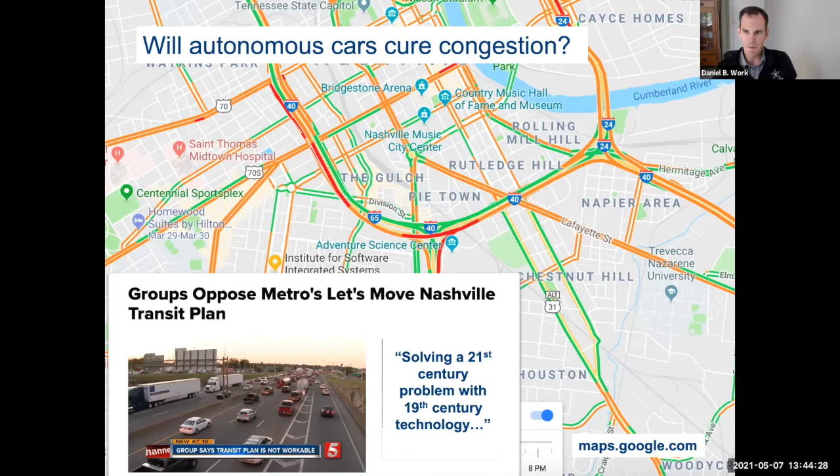Now I'm ad-libbing a bit here to make the point more extreme, but everybody involved in transportation knows that congestion, the typical Google Maps traffic you see, is the imbalance of demand for travel and what the infrastructure can supply. It can be out of balance with regular drivers, and it can be out of balance with autonomous vehicles. What's important if you want to predict what autonomous vehicles will do for congestion is you need to be able to predict both of those consequences: what's it going to do for the demand, and what's it going to do for the supply?

One of my favorite studies in this area addresses the question of what will happen to demand. The challenge is that we don't have fleets of robo-taxis available today to experiment on. So what can you do? Well, you can do the next best thing: give drivers a chauffeur for a week, with a set number of hours they're allowed to use that chauffeur, and see what happens.

I love this study because its directionality must be correct, right? If you gave me a chauffeur, I would drive more, I'm sure of it. What's interesting is that in terms of the cohorts, you get more miles traveled overall. You have retirees traveling more, which I think is actually great—you're providing access. The problem is that you're providing it in potentially single occupancy vehicles at potentially congested periods of the roadway.

At least in Nashville, I tried to make this point stick: if you're frustrated in traffic today, imagine that fully autonomous future when the car in front of you has no one in it. People in this study would send their cars to go run errands for them. Anytime you have the chauffeur go pick someone up while you're not in the vehicle, that's a completely automated trip with no one in the car, no chauffeur. So those ghost miles would literally be vehicles that are completely empty, still delaying your commute.

So that's only one side of the puzzle. The other side of the puzzle is what happens on the supply side.

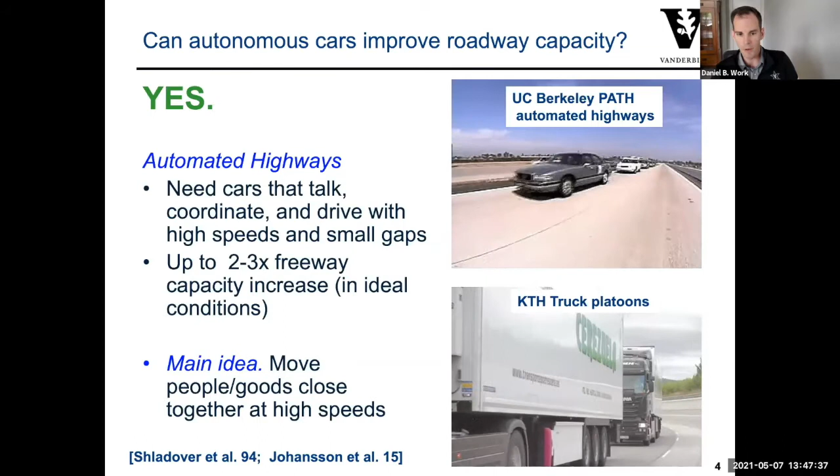These two examples both highlight one important fact: if you want to increase capacity, one way is to move people or goods at very high speeds, very close together. If you can get more vehicles in the same space as fewer vehicles, you're going to increase the capacity of the roadways.

Let's set up a little math to explain how this works. If you've got a bunch of vehicles, keep it simple: assume they're all the same length L, assume they all travel at some speed V, and assume the distance between the front bumper and the rear bumper of the car ahead is a fixed delta X. We often refer to the spacing of the vehicles as the front-bumper-to-front-bumper distance, which is nothing more than delta X plus L.

If you want to know the density of traffic rather than the spacing of the vehicles — spacing is how much distance per vehicle, density is how many vehicles per distance, how many vehicles per mile. It's a natural way to talk about traffic in terms of the density of the flow. The density is related to just 1 over the spacing.

From fluid mechanics, we know that flow is equal to the product of density times speed. Recognizing that density is just the inverse of the spacing, we can rewrite the flow on the freeway as the velocity divided by the space gap delta X plus the length of the vehicle. This is important because it relates the speed of the vehicles and the space gap between them. Those Buicks in that last video have a very small space gap traveling at the same speed humans do, and as a consequence, they increase the capacity of the roadway.

So if you want to increase the capacity of the roadway, you can either increase the speed and keep the spacing fixed, or reduce the spacing and keep the speed fixed. I guess it's possible you could also reduce the size of the vehicle, but barring that, those are basically the only options: make cars drive faster, or make them drive closer together. Those platooning technologies are ways to get cars to drive closer together.

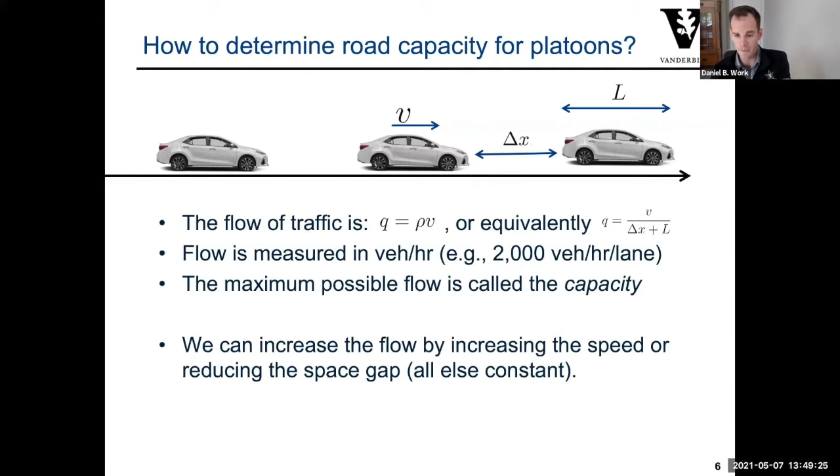If you extrapolate this to the classical models used to characterize traffic flow, you end up with a model of how dense the traffic is, or the inverse of the spacing, versus the speed the vehicles are traveling. That gives you the fundamental diagram, which shows that as density increases, if speed is fixed, flow increases up to a point, at which point the roadway exceeds its capacity and congestion appears.

If you have automated vehicles driving with larger spacings at the same speed, you end up with a speed-density model that's actually bad for capacity. It reduces total flow on freeways by having automated vehicles drive very conservatively relative to humans. On the opposite end, vehicles that drive at much closer spacings at the same speed are actually good for capacity. They allow more vehicles through the same freeway than if it were only under human control.

Again, the core idea: move people at high speeds close together. A way you can build a freeway on top of a freeway without doing anything on the technology side is picking up another person. If you carpool, you can double the capacity of the freeway if everyone does it. If you pick up more people in your car, you could 4x the capacity. The point here is that the goal should not be to move vehicles per hour, but people per hour.

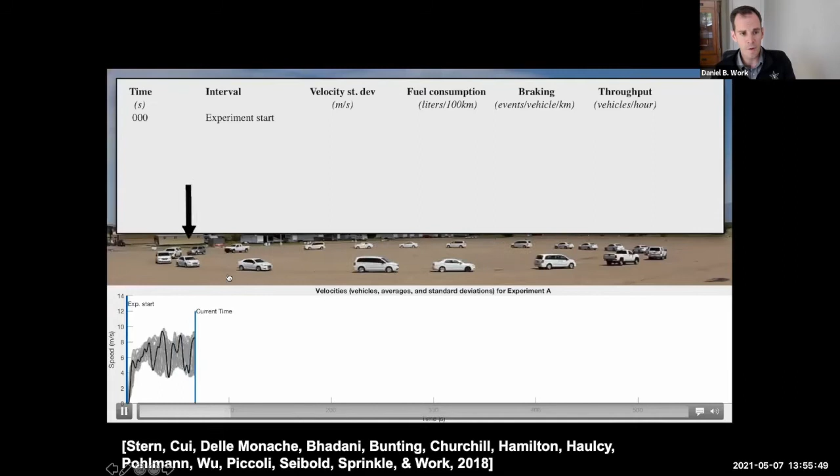With this idea in mind, we repeated the experiment from the researchers in Japan. We got a collection of vehicles on a closed track and told the drivers to basically follow the vehicle ahead. The experiment is set up with one small difference: the vehicle with the black arrow on top is a $300,000 automated vehicle. Currently, it's being controlled by a human. Now that the arrow is red, its speed is being controlled by an algorithm whose sole job is to dissipate the stop and go wave that was in the video.

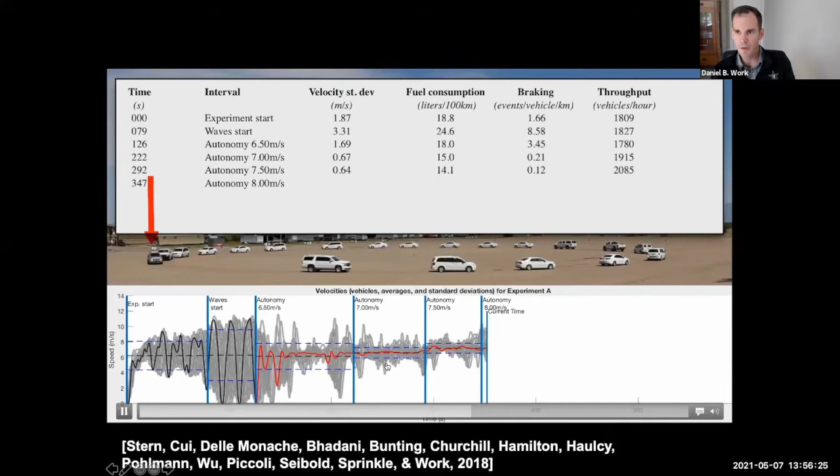As the experiment continues to run, you can see that one vehicle is effectively pacing all of the other vehicles on the track. Instead of having the high volatility, high speed fluctuations characterized at the beginning of the experiment, when that vehicle is driving at its ideal speed, it ends up reducing the oscillations of all the vehicles on the track. Well, why should you care?

Not only is the traffic smoother, but in terms of fuel consumed, the smooth flow compared to the stop and go wave period has a 40% lower fuel consumption. In other words, that one vehicle controlling traffic made entirely of other human-driven vehicles—real experimental drivers with data collection devices installed in their cars—we measured the fuel consumption in the stop and go waves and compared it to when the vehicle was pacing the other ones effectively. We were able to reduce the fuel consumed by all of those vehicles by 40%.

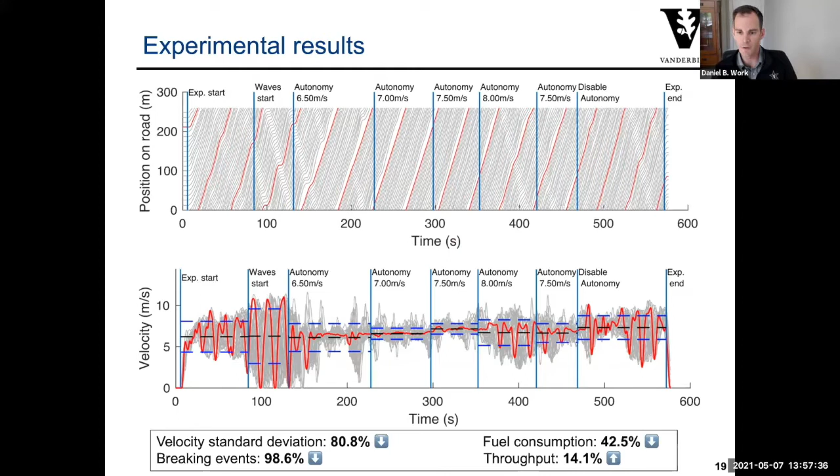Okay, this should come with a huge disclaimer, right? You can't magically get a 40% improvement in your fuel efficiency just by getting rid of phantom traffic jams, because if you're driving on an empty roadway, no jam exists, so I can't do anything to make that more efficient. Similarly, if the roadway is completely jammed, again there are no stop and go waves, so I can't really do much there either. That measure of improvement is measuring what would happen if you have a stop and go wave compared to what would happen if you eliminated that stop and go wave. But still, I think this is noteworthy, right? This is basically showing that if you control the cars correctly, you can actually get real benefits to the traffic flow overall.

So how does that work? Well, what we end up doing is building a very simple model of the way that humans drive and then modify it to be able to implement in a control vehicle.

So the way that humans drive, we assume that we have a model of acceleration, and the acceleration of the vehicle - it speeds up or slows down - is some function of the information about the car ahead: how far apart is the car ahead (that's the space gap), what's the relative speed difference between the car ahead and your current vehicle, and how fast are you currently traveling. There are a huge variety of models that all fit this type of form known as car following models.

It doesn't really matter which specific model you use to describe how humans drive. What's important is that you end up basically with a model for each of the vehicles. And if you put all these vehicles on a track, you'll end up with something like 2n state variables that describe the dynamics of the system - the position and velocity of vehicle 1, the position and velocity of vehicle 2, and so on, until you've described all the different vehicles, all coupled together through these dynamics written in some kind of car following form.

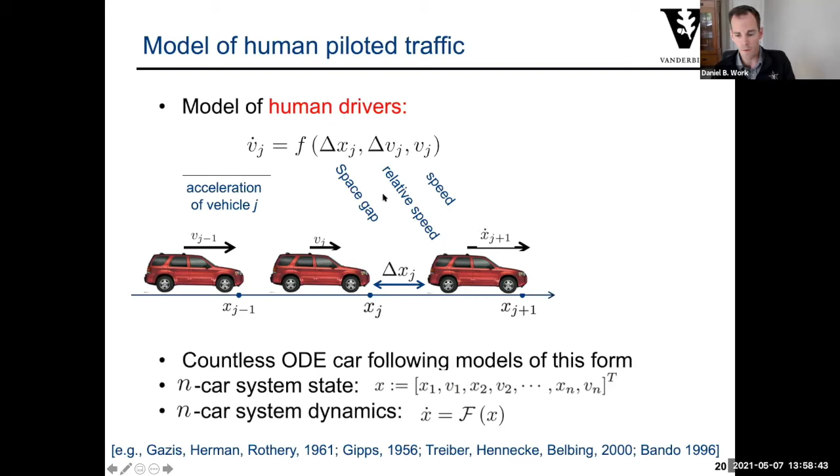The models are nonlinear, but they can be analyzed, and the way that we analyze them is actually by linearizing those dynamics and then looking to see if we change the behavior of only one of the vehicles on the track. Instead of driving like a human, we add some additional term to force that vehicle to also relax to some stabilizing vehicle speed.

So this you can read as the automated vehicle, vehicle J. I want to try to match some desired equilibrium speed on the track. Kind of think of it as the average speed - it's not quite the same thing, but close enough.

Think about how long it's going to take the car in front of you to drive around the track. It's going to speed up, slow down, speed up, slow down. You could cover the same distance in the same amount of time by driving at the average speed, and you would have a lot less variation in your speed, right? So you can think of the equilibrium speed qualitatively as that. It's not mathematically the same thing, but it's not too far off.

So if you kind of knew that speed of the vehicle ahead of you, how long it's going to take to get some distance, you could try to drive not just like the human in front of you does - otherwise you'd make the same waves - and kind of relax your speed to try to drive at something more steady.

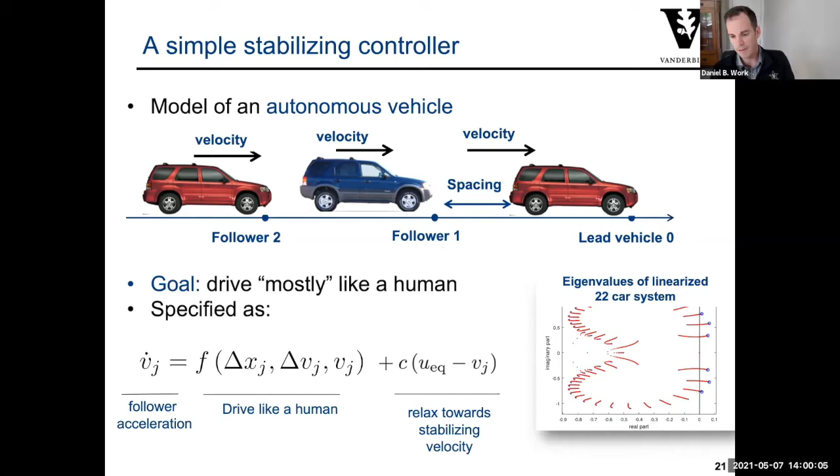And if you do this, you can mathematically prove that it's possible to choose some coefficient C, some kind of gain parameter, such that for the 22 car vehicle system, you can stabilize the vehicles. You can choose the eigenvalues of the dynamics of the system all in the left half plane, and everybody's happy. So that's a little bit of the theory behind how we made that experiment work.

Now, in terms of what the commercial cars do - there's a lot of discussion about the higher order, higher level automation vehicles, but the ones that you can buy on the showroom floors today are the driver assistance and partial automation systems. Basically, adaptive cruise control is a very common feature that takes over the longitudinal control of the vehicle - it takes over the speed, makes sure that you don't collide with the vehicle in front just by driving at a steady 70 miles an hour.

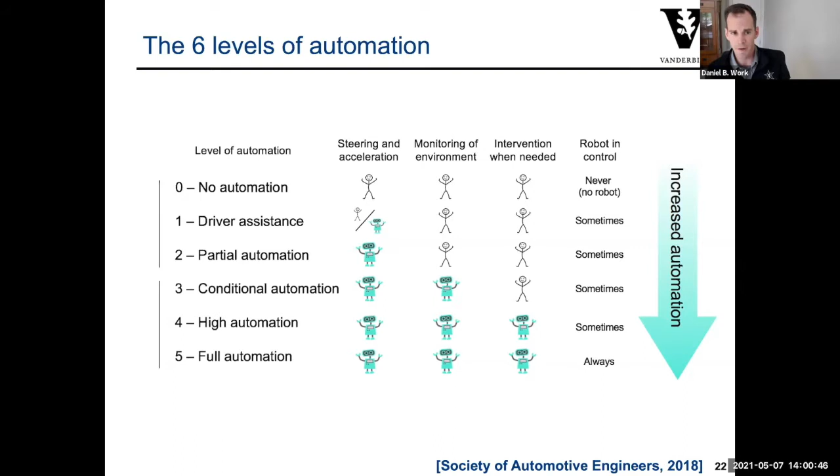It will adjust your cruise control in such a way that it responds to the vehicle ahead. And increasingly, cars are coming with lane keep assist features that basically help you steer the vehicle back in the lane. If you're steering at the same time you're controlling the speed, then you're operating at a level 2 vehicle automation system. And these vehicles are pretty much pervasive in the US vehicle fleet.

So you take the 20 best-selling vehicles - this is from 2018 - at that period, 16 of the best-selling 20 cars either had adaptive cruise control as an optional or a standard feature on the vehicle. So these automation systems are already out there. And so it's really interesting to try to ask the question: well, what do these automation systems actually do, and how do they compare to humans?

So we were fortunate to have an opportunity to collaborate with Ford on an experiment where we went to the Michigan Proving Ground, owned by Ford, and got a collection of Ford vehicles that are all running adaptive cruise control. On their test track, we basically compared what happens when humans are driving without any kind of automation, without adaptive cruise control, and what happens when their vehicles have their adaptive cruise control or radar-assisted cruise control on.

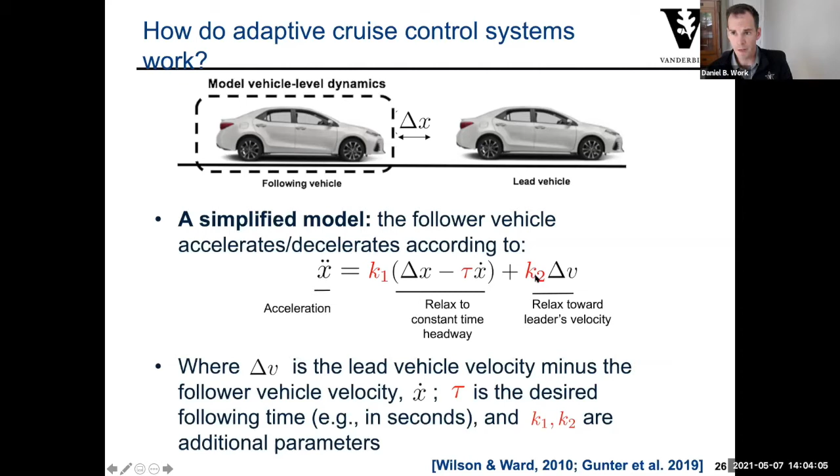There are 3 parameters in this model: K1, tau, and K2. The parameters are basically chosen by the control engineers to describe how they want the vehicle to perform. It's mathematically convenient that you can take a car following model of this form.

This is a model for adaptive cruise control. And if the coefficients K1, tau, and K2 satisfy some mathematical expression that was derived by Wilson and Ward, that actually tells you whether or not this car following dynamic is string stable or not, you can check to see if the system is string stable.

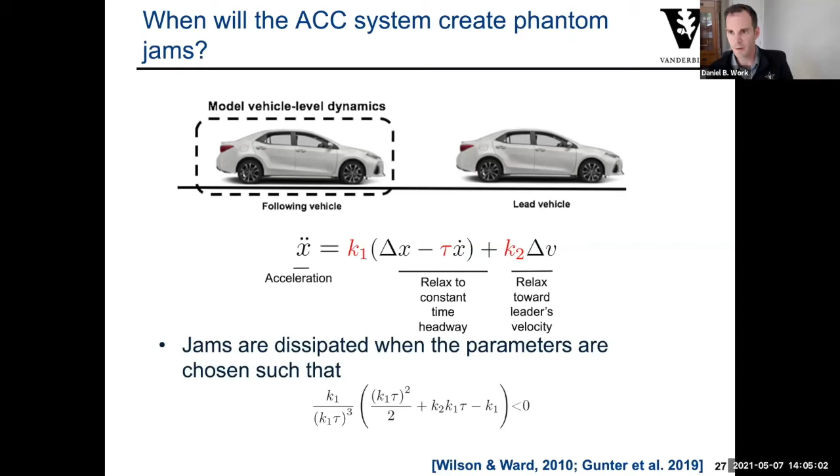Let me give you another way of saying it. So I give you this model. If you tell me what the parameters K1, tau, and K2 are that were used to describe how this vehicle operates on the roadway, I can plug it into this function. If the left-hand side is less than 0, I know this is a vehicle that is going to dissipate stop-and-go waves rather than create them. On the other hand, if this expression is not satisfied, there exist at least some disturbances that these vehicles will amplify rather than dissipate.

This type of insight about how adaptive cruise control vehicles work and how car following dynamics work has a wide literature, and it was basically separately derived in 2 communities that have since converged. As soon as people started driving vehicles, a lot of the work done by core traffic engineering scientists of the time was interested in putting vehicles together in platoons and understanding the nature of how humans drive.

And very quickly, as soon as car following models were being proposed, it was identified that these types of string instabilities could exist. And at the same time, there was a large group of people working in the control theory community that were also interested in whether or not it would be possible to automate these vehicles.

They started recognizing the same types of issues, that if you wanted to specify to vehicles, I need you to follow at a fixed distance to the car ahead rather than a fixed time headway. So that would be something like, I tell you, follow the vehicle ahead by 60 meters or 10 meters or 5 meters. That's a fixed distance. That's actually different from asking you to follow 2 seconds behind the car in front.

It's actually, for string stability, very important to specify controllers based on how many seconds behind the vehicle ahead you would like to follow rather than the distance. Practically, this means that as the speed of the platoon changes, the length of the platoon will change. At lower speeds, the vehicles get closer together, and at higher speeds, the platoon extends to maintain that 2-second separation distance. But if you do that, it's provable that you can design adaptive cruise control systems that will be string stable. In other words, they will not create these types of phantom traffic jams.

The lead vehicle will execute a slowdown maneuver. All the vehicles behind are identical adaptive cruise control vehicles. We want to understand whether that slowdown is basically absorbed by the adaptive cruise control vehicles, meaning they're able to stabilize phantom traffic jams rather than create them, or if they amplify those slowdown events.

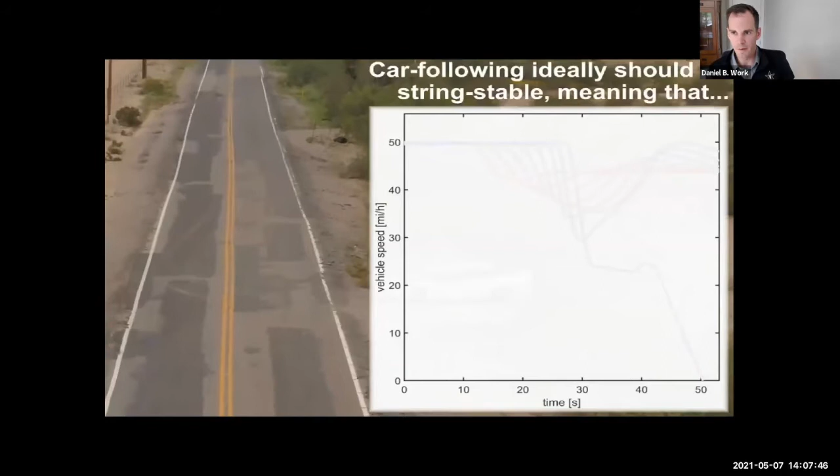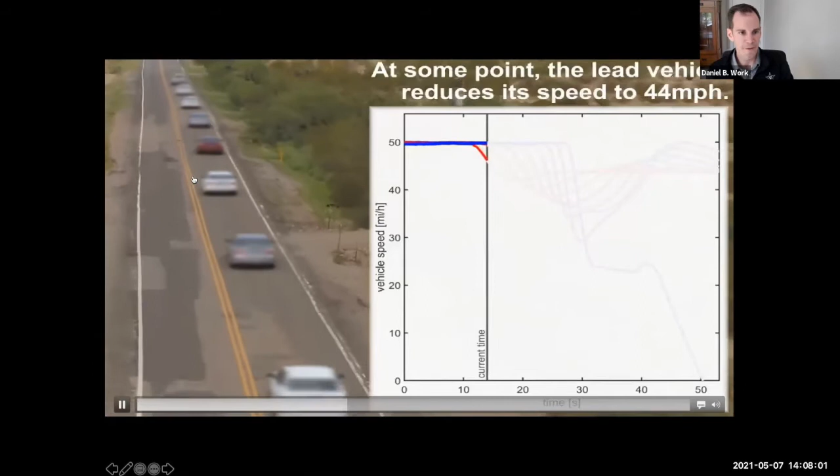So a slowdown, we'd expect, if it's going to amplify a jam, the lead vehicle is going to slow down, and we'd expect to see the vehicles behind, by the time they react, slow down more than the car in front. You can see we've blurred the vehicle makes to hide the identity. It's not really important what kind of vehicle they are.

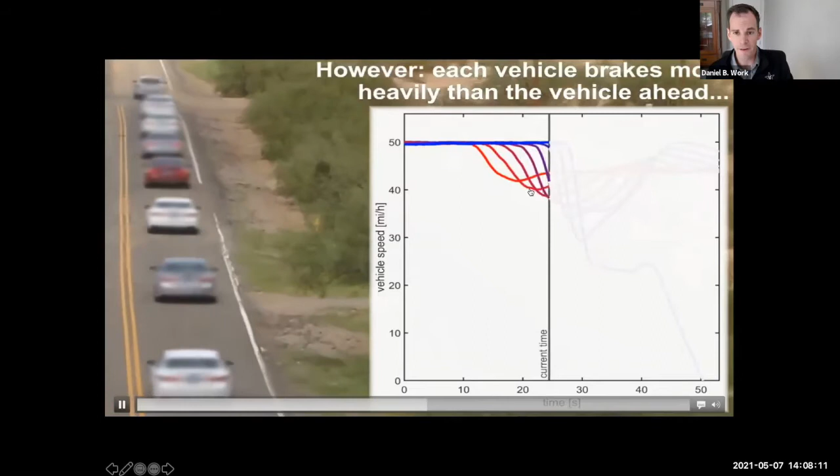Lead vehicle slows down. The vehicle behind slows down a little bit more than the vehicle in front. The vehicle behind that slows down further. You can see as the video continues to elapse, the vehicles towards the end of the platoon have to slow down significantly further than the lead vehicle does.

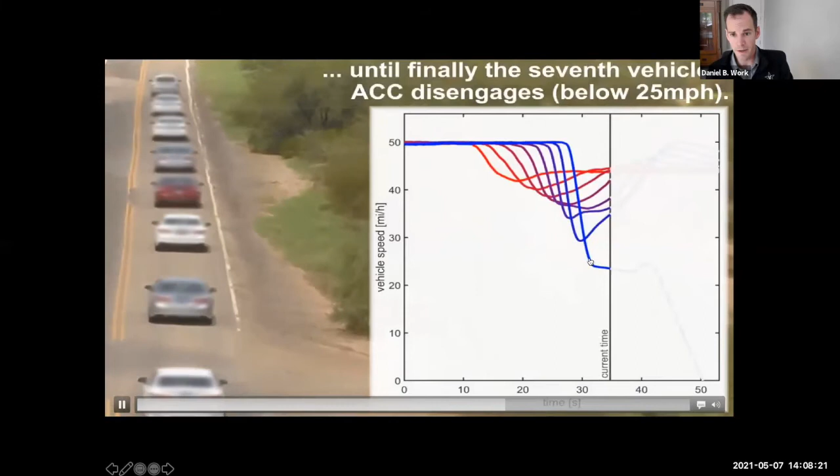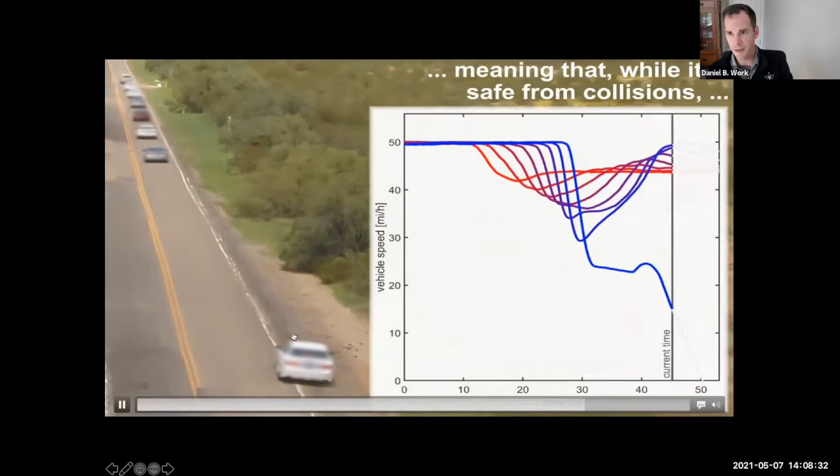The last vehicle in the platoon actually needed to slow down below the minimum operating speed of the adaptive cruise control system. In other words, this driver in the last vehicle was told that if the system disengages the adaptive cruise control, please pull out of the experiment. That initial, I think about a 6-mile-an-hour slowdown event, caused that last vehicle to slow down more than 25 miles an hour, showing that for that particular make of vehicle, it is not a string stable adaptive cruise control system.

Since then, we started testing a lot of additional vehicles, and every vehicle that we've tested so far has the same problem. There exists at least some disturbance that these vehicles will amplify rather than smooth out. The way we did this is basically taking these vehicles, driving them through more than 1,000 miles of data collection in a very controlled setting, where we could see how it responds to different things that happen to the vehicles ahead. We take all the data, we calibrate a model, and then with those models calibrated, we can check the string stability condition using that mathematical condition I presented earlier.

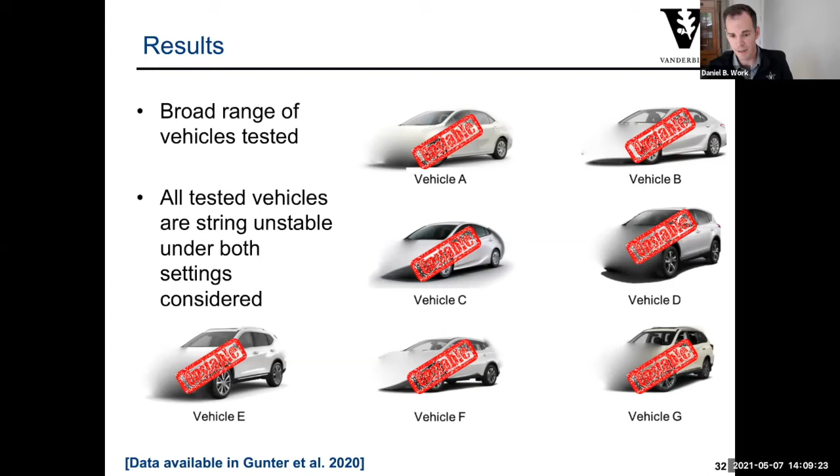We then later test the sensitivity of these models to make sure that, since the model is an approximation and our data collection has errors in it, is it possible that there's another model that fits the data just about as well as our current model does, but that would give us a different answer in terms of the string stability? If so, then we can't reliably say that the vehicle is string unstable. What we can say is that our data is not representative enough to make that decision.

What we found out by setting up a formulation of an optimization problem, where we basically say give me the best possible parameters that fit this data, is that the models are string unstable. We then later go back and ask how much worse would the model need to be in order to give you parameters that are string stable. Depending on the vehicle, the make and model, and the time headway setting, we found that we needed to increase the error of our model fit anywhere between 5 and 30%. In other words, we pretty reliably know that these models are in fact string unstable for some perturbations.

So the takeaway so far is that I've shown you an example of a video with a $300,000 autonomous vehicle that we controlled. We designed everything the way we wanted it to be, and we could smooth out phantom traffic jams with one car in a collection of 20 on a track. I've also shown you some optimistic videos relative to humans, along with additional information showing that the vehicles out there right now are not going to be the magic elixir. They're not going to be able to solve the presence of these phantom traffic jams. They'll still exist, since all the vehicles we've tested so far are string unstable.

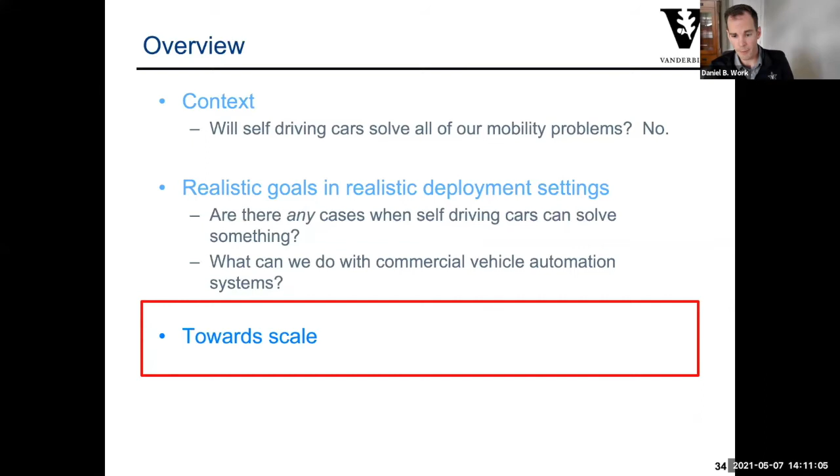So that really gets to the last piece I want to talk about, which is what we can do at scale. We've tried to take these ideas, what can be done on a single autonomous vehicle on a closed course, and what can be done with commercial vehicles, and figure out how we're actually going to get this to the level where a car company would care.

Every time I show the Ring video, the common criticisms are pretty obvious: it's a closed course, the drivers had to go through training before they could participate, there are no lane changes, and if you leave too large of a gap, isn't a human driver going to cut you off and prevent the ability to do the control? Yes, yes, yes, yes, and yes. These are all real issues that would need to be addressed.

So what we've done is try to figure out how to take these concepts, recognizing that commercial vehicles already have all kinds of features on them. If we could just modify the adaptive cruise control systems already on those vehicles in small but important ways, we might be able to use a huge fleet of them on an open freeway and actually get to the core of the issue: dissipating phantom traffic jams on real freeways.

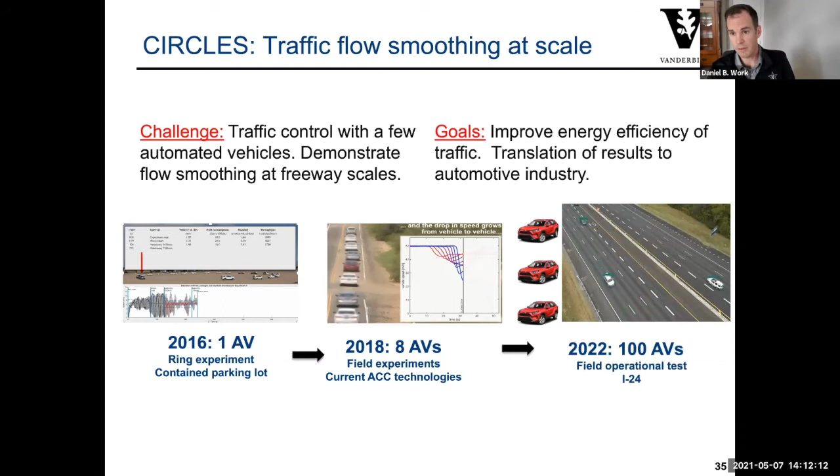And so that's our project goal. The project name is CIRCLES. CIRCLES is in fact a coalition of 5 universities, more than 45 researchers, 2 OEMs, Toyota and GM, and the Tennessee Department of Transportation, where we're trying to tackle some of the scalability issues.

The first scalability issue is that we need to be able to modify basically stock adaptive cruise control equipped vehicles to have any fighting chance at building a fleet of 100 plus of them. We don't have Waymo scale budgets, so we need to be able to cheaply control vehicles that don't require us to put hundreds of thousands of dollars of sensors on them.

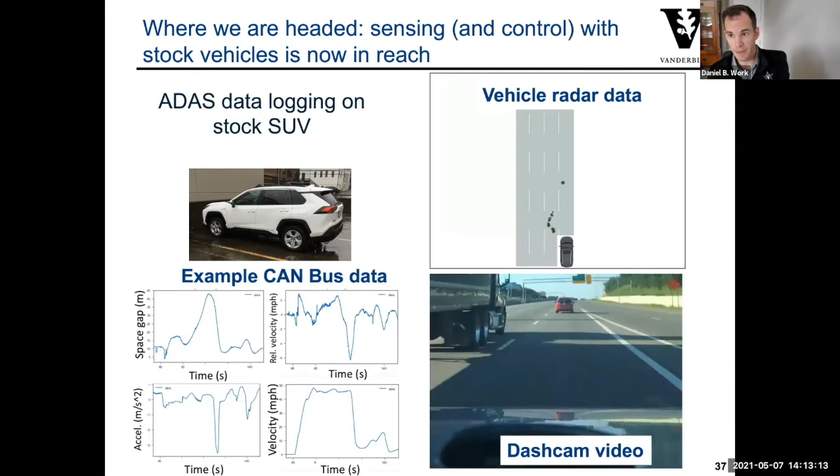What I'm showing is a picture of our lab Toyota RAV4 vehicle, which is now capable of reading the radar information off of the stock radar sensor on the vehicle. It's pushed through the car communication network, known as the CAN network — CAN is the name of the network. It's got all kinds of information from the sensors on that vehicle, and it also offers us the ability to actuate the vehicle. We can overwrite the stock adaptive cruise control system. That's really important for a lot of other car-following experiments we're doing that have nothing to do with traffic flow smoothing, where we're just trying to understand the nature of human driving behavior.

I'll show you a couple of pictures of what car following experiments looked like in the early days of GM and others doing car following experiments. My favorite is this thing called the GM fifth wheel. It's a bicycle wheel they attach to the back of vehicles so that you could easily measure the speed of the vehicle and basically log the information about the speed of the vehicle.

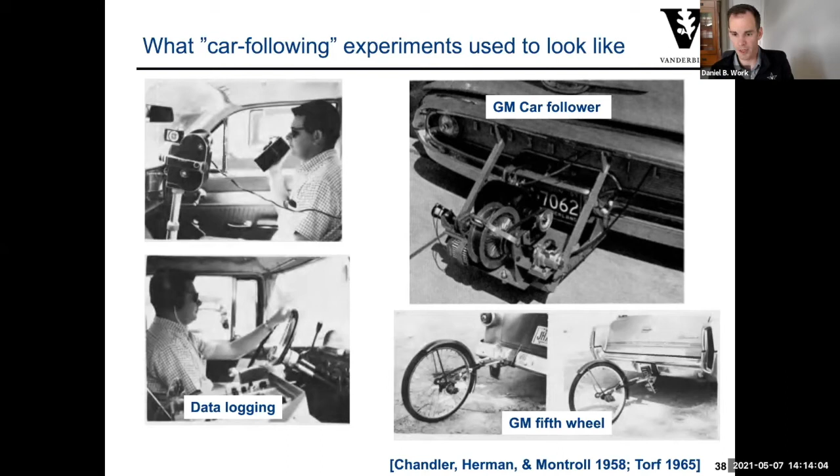And the GM car follower was basically a giant grappling hook that physically connected the two vehicles together. The cable was under tension, and so you could measure the space gap between the vehicles as the cable was pulled out and pulled back in as the vehicles adjusted speed. Well, that is obviously extremely difficult to test on an open roadway.

Because we have the ability to read the radar data directly off of our lab vehicle, now we're basically putting in a Raspberry Pi that's capable of logging relative velocity and space gap data directly from the car's stock sensors. So you basically pay for the data logging, you don't pay for any of the sensors that need to be installed on the vehicle. This is just a short video of us running a small experiment in Nashville where you can see the relative velocity and the space gap dynamically changing on the left and right respectively as the vehicle ahead gets further apart and closer together. So this is a very important way to be able to collect data at scale.

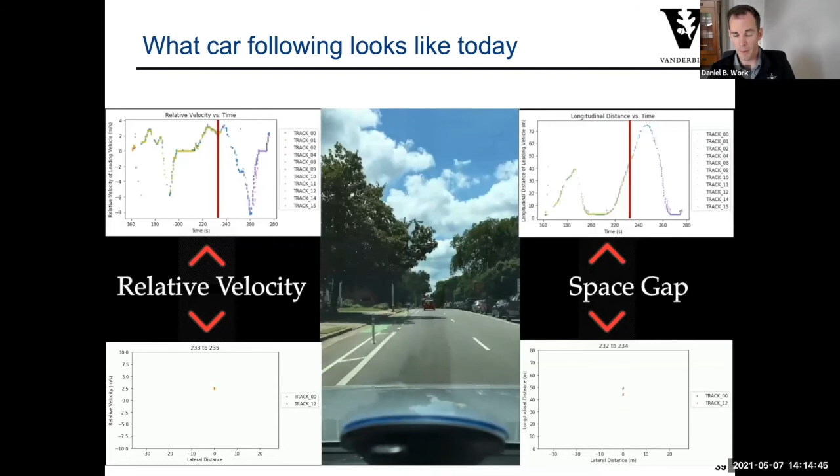So in one piece, we're working on how do we get low cost ability to sense and control vehicles. And on the other hand, I need to figure out ways that I can measure the consequences of putting these vehicles on the open roadway.

Unlike the circular track, which is very easy to film with a single camera and measure the features of all the vehicles - moreover, we can install loggers in the cars in the experiment - on an open freeway, I don't get to control any of the other vehicles on the roadway. I don't get to install any devices inside those vehicles. And I can't, from the vehicles themselves, measure the full information about the traffic state.

So we've been trying to tackle this problem, really taking inspiration from the seminal next generation simulation project known as NGSIM. One of the data sets, which I'm showing here, was collected on the Interstate 80 freeway in Emeryville, California, where they stuck 7 cameras on a 30-story building, and that allowed the creation of 3 15-minute long data sets that track the trajectories of all the vehicles on the roadway. This data set was, of course, fundamental in terms of microscopic traffic simulation, and has been cited at least 2,500 times for the value of the data that gets created.

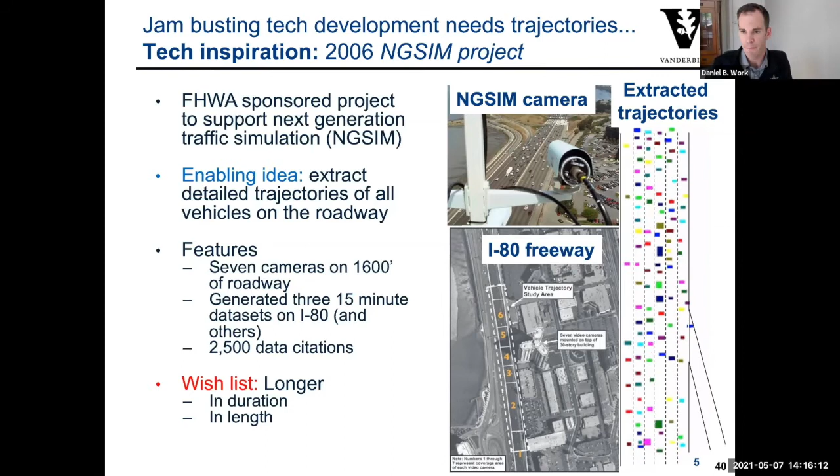But of course, every time we bring these types of things up, we constantly run into the same issues, right? The data set is too short in length, and it's too short in duration. Everybody wishes that we had more of it in all possible ways.

So recognizing that, we've been working closely with the Tennessee Department of Transportation, who is investing on the order of $100 million on a major freeway just outside of Nashville, Interstate 24, which is experiencing tremendous growth and has no control infrastructure on the corridor. The arterial traffic signals are not timed. The ramps don't have meters. There's no variable speed limit control. And it's actually a relatively dangerous corridor.

There's a large number of crashes, and some of them are fatal. And so they're deploying a lot of technologies to try to make this corridor a little bit safer to commute on as the growth in the area is continuing to accelerate.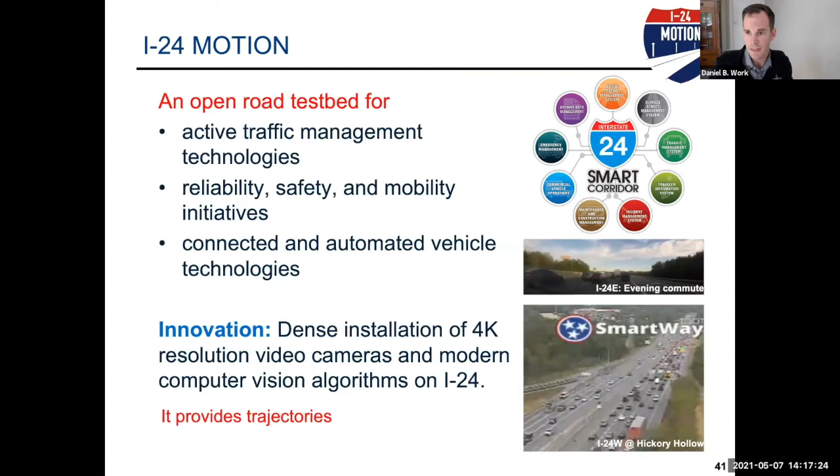So what we're trying to do is basically deploy, in the same style of NGSIM, a large number of very high resolution, 4K resolution video cameras that would give us the same type of information that we got from NGSIM, with 3 goals in mind. We'll be able to better understand how the active traffic management technologies that TDOT deploys on the freeways works with regular drivers. We'll be able to use that information to hopefully improve the reliability and, importantly, the safety of the corridor. And we also have interest in testing our connected and autonomous vehicle technologies.

So in the fall of last year, during the pandemic, we were able to work with a number of firms in town and the Tennessee Department of Transportation to test this concept of basically getting cameras high in the air permanently so that we can continue to collect information that can help us unlock these wave smoothing, active traffic management, and safety technologies.

This video is showing some work that we did on an early Sunday morning with a team of more than, I think, 50 folks on the construction side, helping us raise these 110-foot tall poles spaced every 500 feet on the freeway. At the top of all these poles are pods of 4K resolution cameras that point down at the roadway and allow us to collect data.

To give you an idea of how this system works, this is now currently operational. We have 3 poles that you can see on the left here that each host 6 4K resolution cameras. There's a fiber network that connects these poles to a hub facility a few miles down the freeway, where we've installed computers that can run computer vision tracking algorithms. Those computers receive the video data from the 18 total cameras that all have overlapping fields of view.

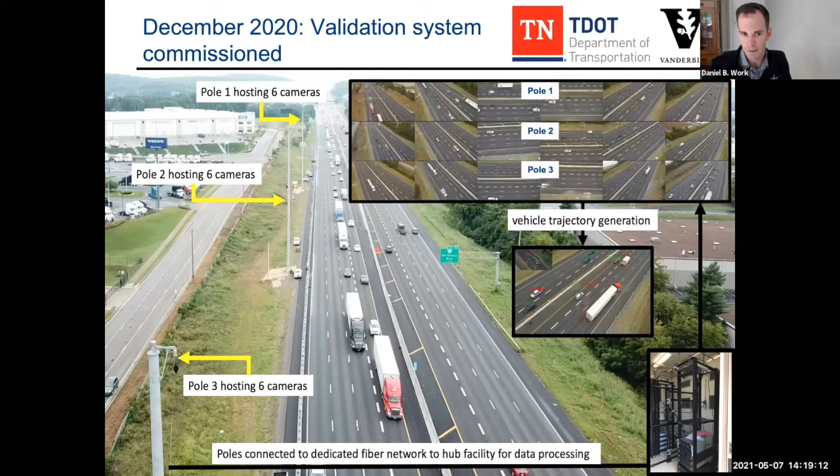On that video data, we run computer vision tracking algorithms to get rid of this high resolution, very impossible to save because it's so large, data set, and get what we actually care about from the traffic flow theory perspective: the trajectories of the vehicles, basically their position, velocity, and acceleration as a function of time as they pass through the corridor. This system is currently collecting trajectory data on something like 180,000 vehicles a day that pass through this corridor.

On the computer vision side, there's actually quite a bit of advances that have been made since the time of NGSIM. In fact, now detecting cars in a frame is a relatively solved problem. It's not perfect, but there have been significant improvements where we can use detectors like YOLO, ResNet, and a bunch of other object detectors that are pervasive in the computer vision literature, that basically draw a bounding box around the vehicles in the scene.

In terms of tracking the vehicles, I don't just need a bounding box in pixel space. What I need to know is that from one frame to the next, this bounding box in frame 2 corresponds to the previous bounding box in frame 1. It's the same car, just it's moved, right? So there's a detection step first, and then we have to associate those detections with the same vehicle so that we can track.

As we associate these detections from one frame to the next, the final step is to take this information and get it out of pixel space. I don't need a bounding box on a car expressed from pixel whatever to some other pixel. I need to know the actual real world coordinates those bounding boxes correspond to. So there's a very standard approach in computer vision to convert from the image plane, basically what the camera sees, to the road plane where the vehicles are located.

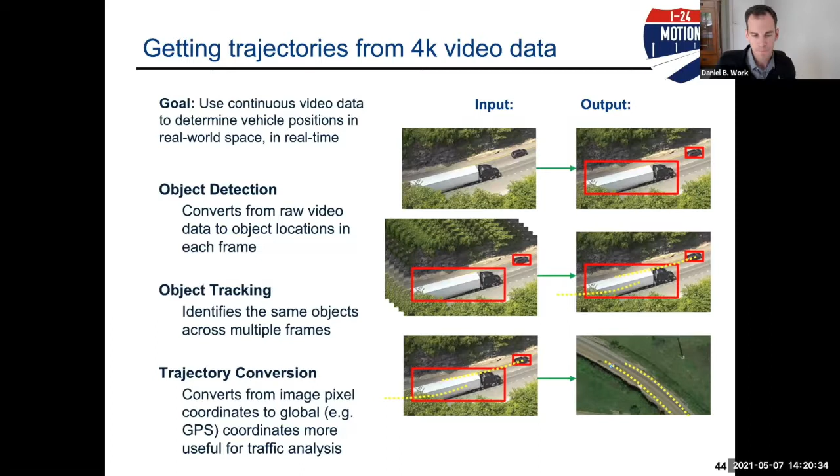Just to give you an idea of what this looks like, you can see the squares that are tracking these vehicles as they pass through one of the cameras. Then, basically using the approach I qualitatively described in the last slide, we can convert that into trajectories, where you can see, drawn on top of a Google Map layer here, the tails of these vehicles identifying that it's the same vehicle we're tracking as it passes through the roadway.

The next step we're working on is not just putting square bounding boxes on cars, but pushing to the limit of what is capable in modern computer vision, which is actually putting 3D bounding boxes on these vehicles in real time.

The setup is that we've got 18 cameras of data currently pushing all this video data to us, and we need to be able to put these bounding boxes on these vehicles, not offline, but in real time, meaning we've got to calculate very, very quickly. This is part of what drives the cost of doing computer vision up pretty significantly, because you more or less need at least one GPU per camera to run these algorithms, unless you take advantage of some algorithmic techniques to speed this up, which our team is working on.

So to give an illustration of where this validation camera network that we just built sits, in terms of NGSIM, the data set that I showed on I-80 has about 1,800 vehicle miles of data inside of it.

Basically, you take the total distance and the total time that all the vehicles have traveled, and the total number of vehicles that travel that distance, and it gives you a vehicle miles traveled measure of how much information is in that data set.

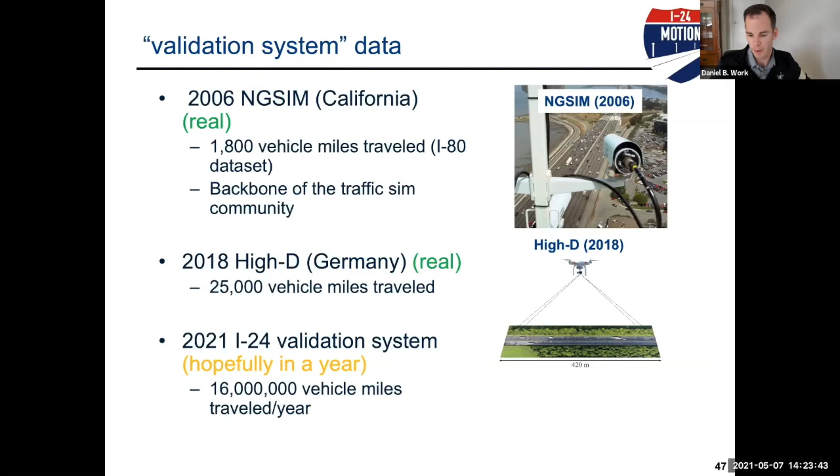So the take-home messages I have for you are really just trying to, at the broad level, recognize that automated vehicles are not going to solve all of our mobility problems, full stop. But if we think carefully about the scope in which we deploy those technologies, I think that we can actually help improve traffic flow in modest ways with modest penetration rates using modest technology, i.e. stuff that's not that far away from what is commercially available.

And we've really been pushing hard in terms of the vehicle technologies and the test beds that we can put these things really in reach to try to drive these technologies into vehicles that are being released today, long before the fleet is fully automated, long before the fleet is fully electrified. We might be able to get some gains on real features in the not too distant future.

I want to wrap up with my last thoughts of career advice. I was asked to speak about that. I think everything that I can share with you so far has been really the success of the great people that I have been surrounded by.

I got interested in traffic engineering as a high school student. Susan Banbury, the planning engineer in Westerville, Ohio, gave me my first job, having no clue I ever wanted to do anything about transportation. She taught me how to do turning movement counts and time signals in my hometown. That got me interested in transportation as a career.

I eventually found my way to UC Berkeley in grad school, where I had a chance to work with Alex Bayen and Quinn Jacobson at Nokia Research Center, Palo Alto, who taught me how to code, how to do mathematics, and how to basically use emerging technologies, at the time GPS-enabled cell phones, to do meaningful things like estimate traffic conditions.